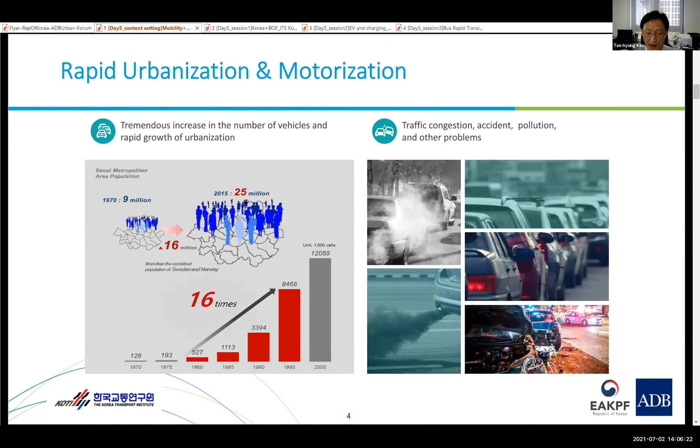So the many cities in Korea have been experiencing a rapid increase in vehicles and urbanization over several decades. This phenomenon has been causing numerous traffic problems in Korea, such as traffic congestion and traffic accidents, air pollution, etc.

So various policies and efforts at the national level have been attempted to solve these transportation problems. Several strategies, such as constructing new roads and managing demand, or providing new modes of transportation to reduce traffic demand, have been attempted. And we found that as one of the feasible solutions, ITS that can optimize and utilize the existing infrastructure and systems was introduced.

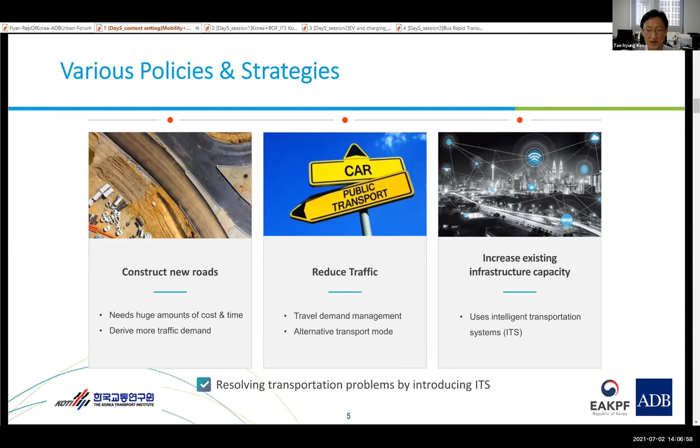The introduction of ITS has brought a variety of effects and benefits across sectors. Above all, the improvement of public transportation services has resulted in an increase in the number of public transportation users and a continuous increase in the modal share of public transportation.

It also had a positive effect, such as an increase in vehicle speed by 15 to 20% and a decrease in the number of fatalities caused by traffic accidents. It has also reduced greenhouse gas and oil consumption by decreasing traffic congestion and idling. The convenience and satisfaction level of citizens using ITS services have continuously increased.

In addition, the effect of contributing to the national economy, such as the growth of ITS-related industries and creation of new jobs, has also been shown. However, we have learned some lessons from the experience of Korea's ITS over 20 years and realized that there may be a next generation of transport systems beyond conventional ITS.

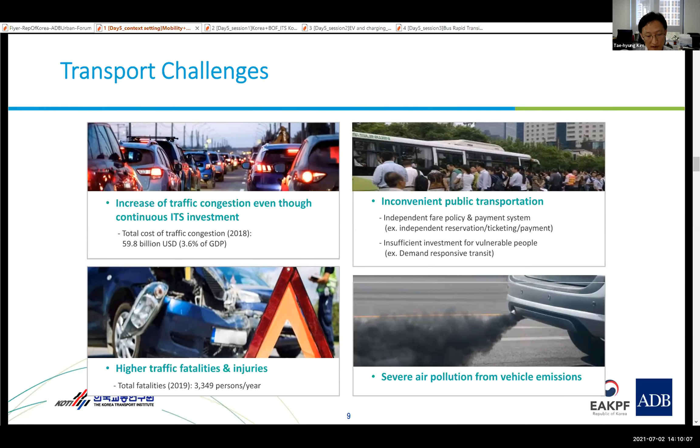The Korean government has initiated public and private cooperation on traffic information since 2014 to secure ITS-unequipped roadways by using private services such as TMAP or Kakao Map in Korea. This enables us to save budget that would be spent on additional ITS deployment and concentrate on ITS services for safety issues.

We also found that ICT advancement, converged with smart devices, big data, Internet of Things, social networks, and AI, has been changing all social service sectors, including transport services, by enabling higher levels of information connectivity.

So what could be a direction for future transport systems, and what kind of strategies and solutions can be applied? I believe one of the best solutions is the integration of transport and ICT-based infrastructure, which is ICT-enabled transport systems, that is, smart mobility.

Smart mobility systems could be deployed in more cost-effective and simpler, easier ways of installation, operation, and maintenance. Services for the people could be greener, smarter, safer, and more inclusive than conventional transport systems. Smart mobility could be classified into four features: autonomous, electric, shared and flexible, and connected and integrated mobility.

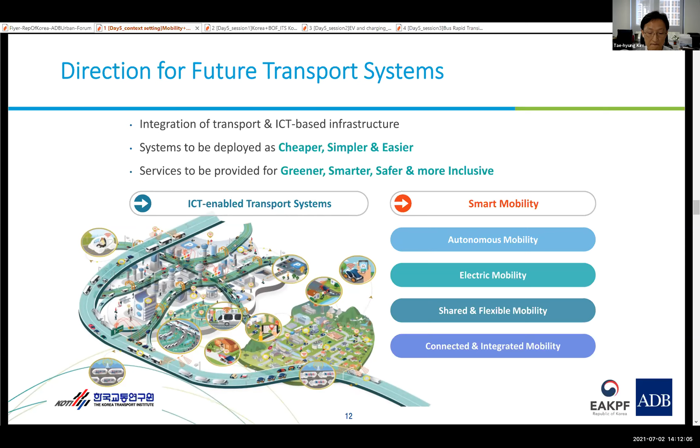From this slide, I'm going to briefly introduce our efforts toward smart mobility in Korea that we have done or are currently in progress.

This is cooperative ITS, or C-ITS, the next generation ITS technology based on vehicle-to-vehicle and vehicle-to-infrastructure communications. C-ITS can collect more accurate and seamless traffic data based on individual probe vehicles and provide more customized and convenient traffic services to drivers, such as traffic information, safety, and emergency services based on V2V and V2I communications.

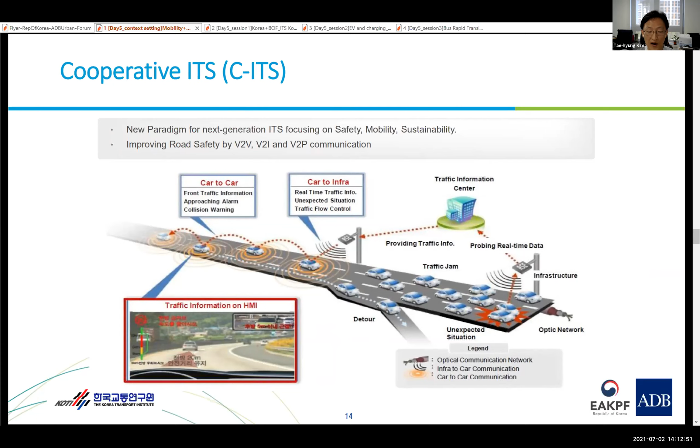The C-ITS pilot project has been successfully conducted on expressways, national and urban highways, and urban roadways in Daejeon and Sejong City for 3 years to verify C-ITS technologies and services and prepare for full-scale deployment. It is now expanding to other cities such as Seoul, Gwangju, and Jeju Island.

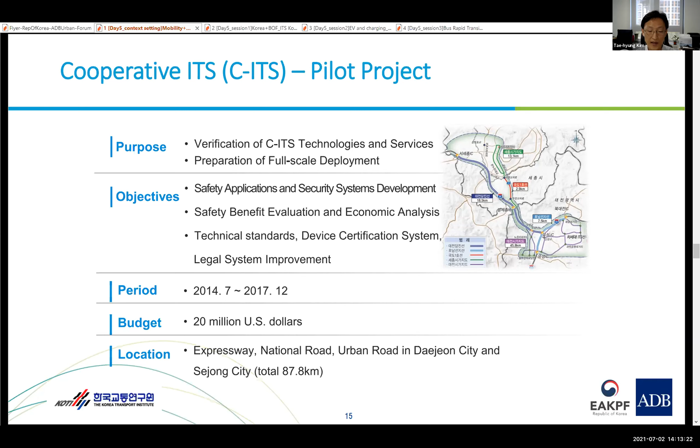This is the automated shuttle service that could be one of the killer services in smart cities. Many countries and cities have developed automated shuttle services such as EasyMile and Navya, and conducted pilot tests or demonstrations on roadways. Korea also developed an automated shuttle named Zero Shuttle, which has been under field test for stabilization and localization in Pangyo City.

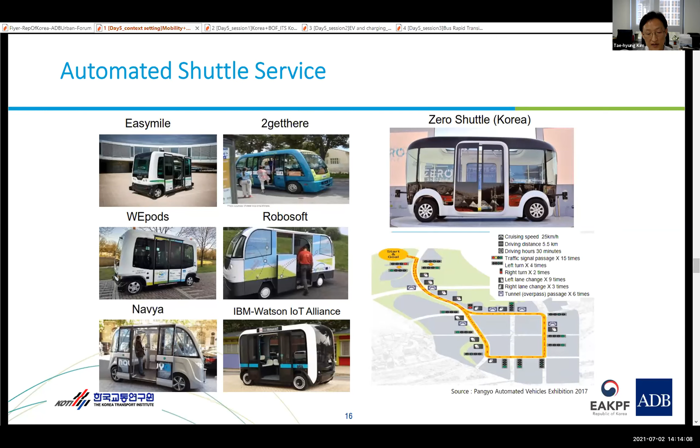In addition, research recently began to develop and serve automated buses to the public through a National R&D project since 2019, and a pilot test is underway on real roadways in Sejong City.

A national smart city pilot project has also started in Sejong 5-1 district. One of the core services is to implement an automated shuttle service for 6 to 12 passengers based on circular operation on a fixed route, with unmanned operation.

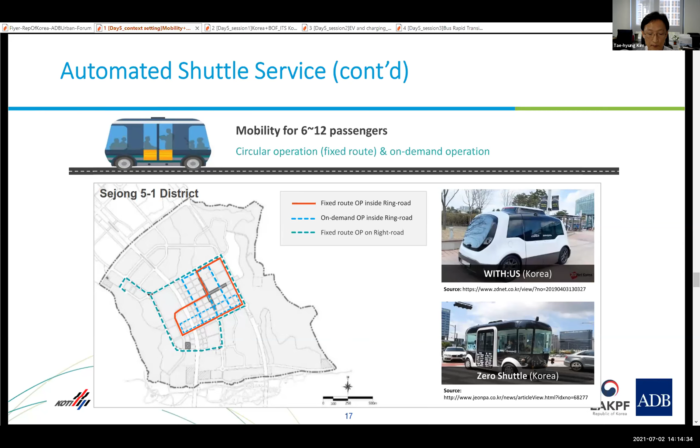In order to improve first and last mile mobility and mitigate traffic congestion caused by vehicle ownership and motorization, we have applied personal mobility and car sharing services, and they are widespread in Korea right now.

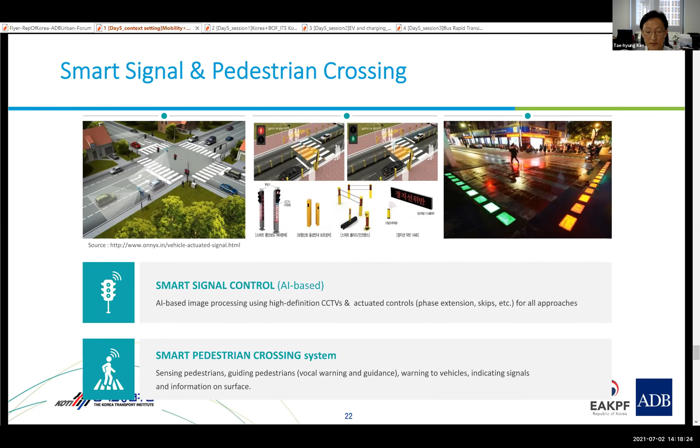Recently, a smart pedestrian crossing system, which has several functions of sensing and guiding pedestrians, warning vehicles, and indicating signals and information on the surface, has been implemented in several cities in Korea and will be expanded nationwide to improve pedestrian safety.

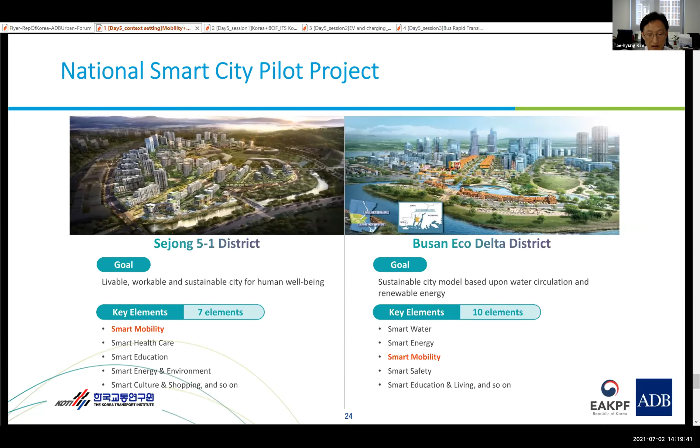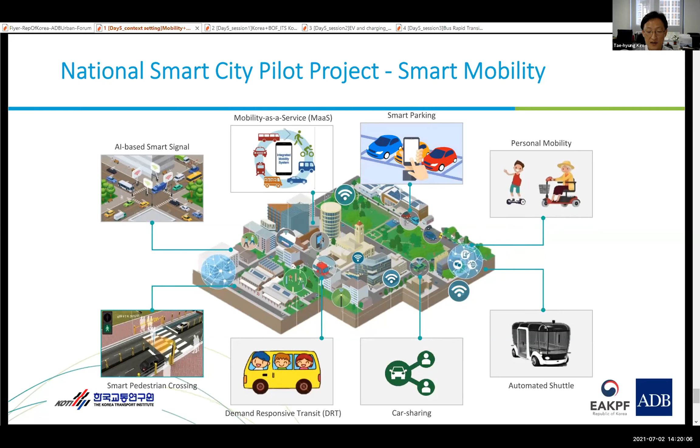These services will be provided to local residents who will move in around May of 2023, after pilot tests for each service. This is the end of my presentation, and thank you very much for your attention.

Thank you very much, Dr. Kim, for that very interesting presentation. It's very interesting to see how you have an integrated system of private vehicles, public transport, and even pedestrians. I think what's also very important is the last mile connectivity, because oftentimes it's the poor and vulnerable that are affected by that. So that's very interesting to hear.

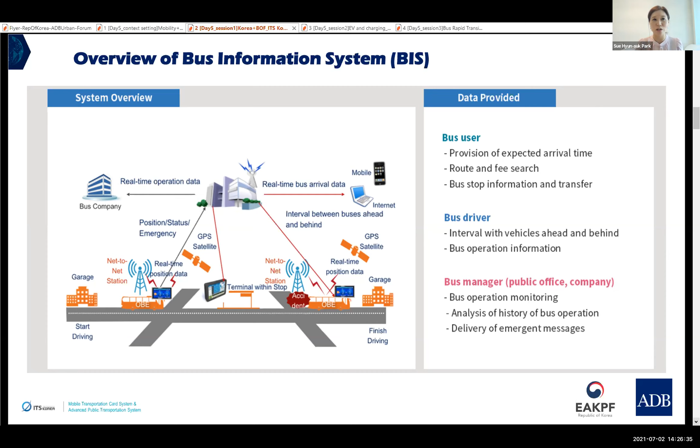Why did we introduce this system? In the past, let me take the Seoul case. In Seoul, the urban traffic situation had really bad congestion, and buses didn't have any punctuality in their arrival. So people preferred to have their own passenger car, and in that way the traffic congestion worsened and worsened.

To improve service quality by securing punctuality and improve user convenience, they tried to improve bus services, which encourages people to use public transportation. So through the adoption of this BIS, we can facilitate the usage of public transportation.

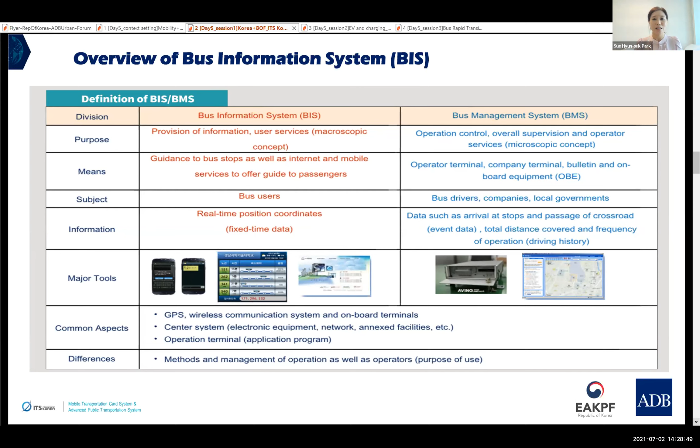This BIS system, it's been a long time to implement this. Actually, BIS is implemented since 2004 to 2005.

Seoul did bus reform in 2004, and at that time they also adopted this BIS system. Right next year, 2005, many local governments started pilot projects in BIS, which means we have like 20-year experience in implementation of BIS.

So now we have lots of methods and lots of ways to implement BIS. For collecting data, we can use the OBE, or we can use mobile application.

In terms of the BIMS center, if the local government has lots of buses operating and secured, in that case they can have their own physical BIS center. But otherwise, if the local government doesn't have enough money or enough buses, in that case they can use the cloud center.

They can share the center with other local governments by the cloud center. Based on your local government situation, we can suggest application, smartphone or website, or if the bus station has really many people using it, we suggest this type of BIT installed in the bus stop.

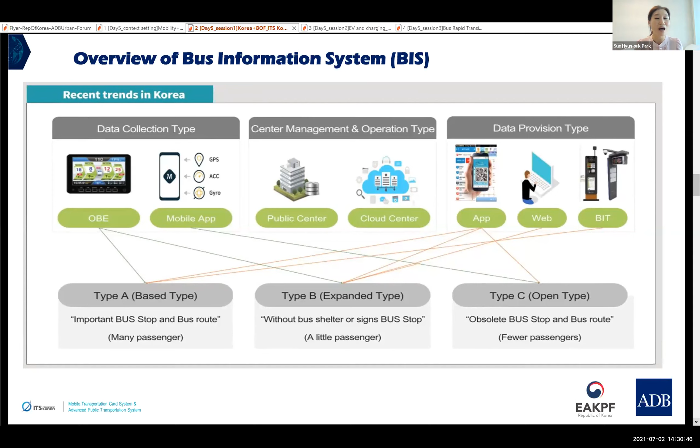As I mentioned, regarding the center, there's the independent center or center sharing, and this OpenBIS is not actually at the commercialized stage. This is the R&D stage and development stage, because without the physical center or without the sensors, we can implement the BI system only using the smartphone application.

So when a country or city wants to implement BIS but doesn't have enough budget, in that case maybe they can use this kind of OpenBIS, but it's not commercialized yet.

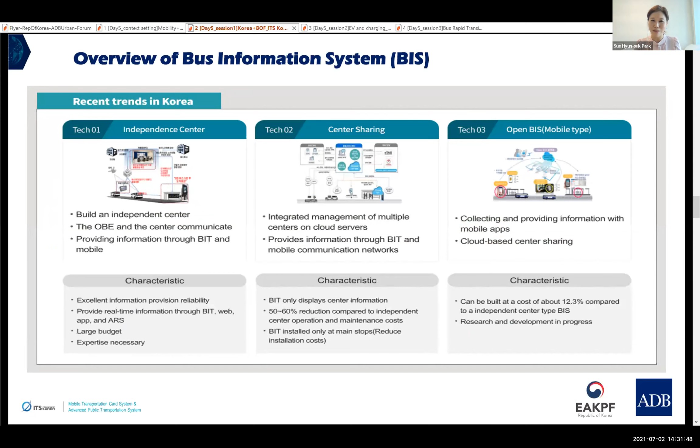As I told you, we have had 20 years to implement BIS. Already 150 cities have their own BIS services.

As I told you, this is quite popular. Now every Korean person is using BIS in their daily life, and the satisfaction is quite high.

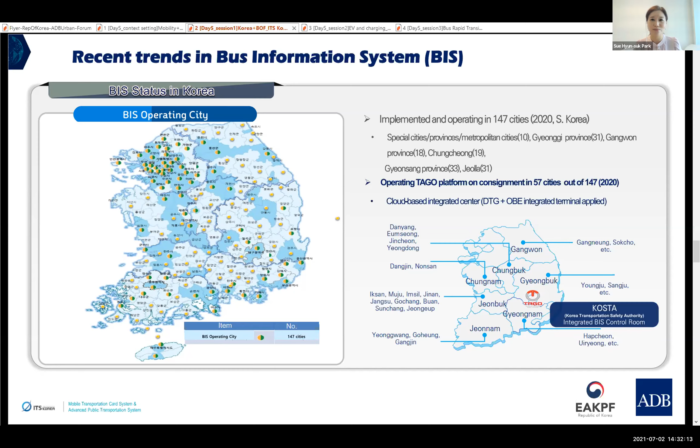If you see here, people are using the bus every day, so these kinds of services are quite close to the people and users. The citizen satisfaction is quite high.

Also, through this BIS system, we can monitor the bus driver's behavior. In the case of Seoul, accidents decreased by 24% because the drivers know the local government and bus company are monitoring their driving behavior. So it is contributing a lot to decreasing bus accidents.

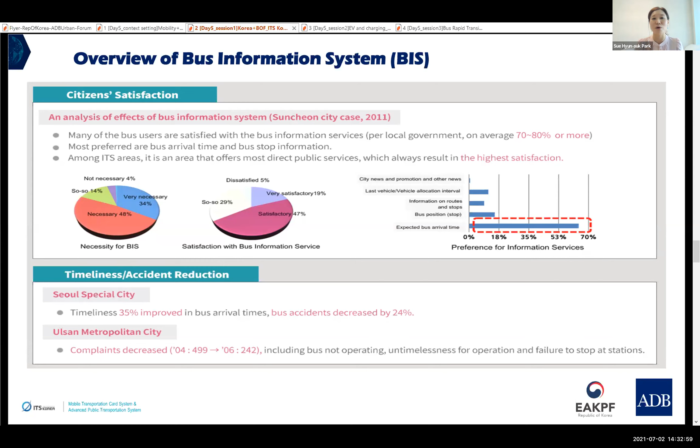Actually, this is something I covered already, so I'll just skip this. Now I'll move on to the AFCS, Automatic Fare Collection System. This is the second part consisting of our public transportation.

Now everyone, or most people, are using the transportation card instead of cash. In the case of Seoul, for the subway it's 100%, and for the bus it's almost 99%.

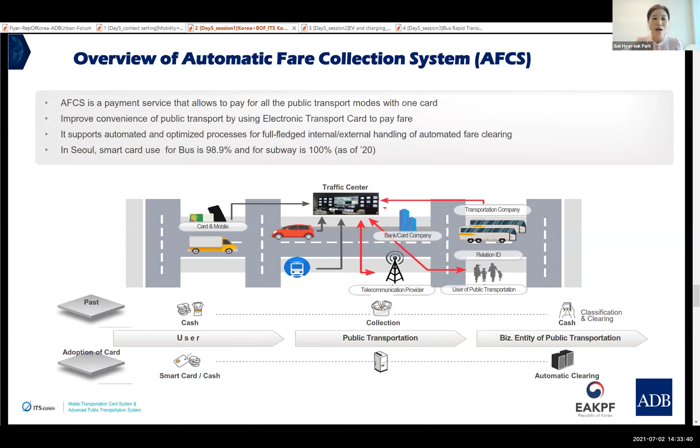In Korea, we have one card, all pass, which means if you have only one card, you can use it everywhere in Korea. Let me take an example of T-Money. If you have a T-Money card, you can use it in Seoul, Busan, and Jeju area.

Not only that, you can use it for various transportation modes: subway, bus, KTX, urban bus, intercity buses, and paying the toll, and many other places with the integrated T-Money card.

I can say that this one card all pass is a very initial stage of MaaS, because we can integrate the transportation modes and pay with one card. By doing that, we increase the convenience of users a lot.

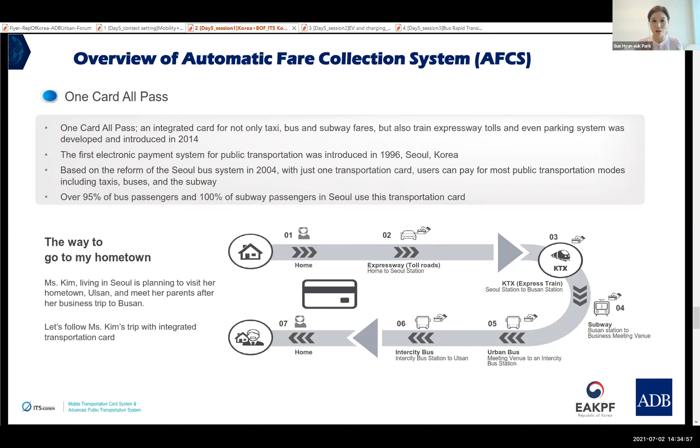Now I'm going to talk about the benefits of AFCS. For the user, it's quite convenient, and all the data is accumulated through this AFCS. This kind of data will be used by local governments or policymakers to establish new policies.

Let me explain about the Seoul MaaS implementation plan. Recently Seoul established the ITS master plan, which includes some of their plans on MaaS. Seoul has 10 million people living there, so a lot of transportation modes are there, and that information and data are integrated through the company called T-Money. So they have bus information and taxi information, and now they are providing some bicycle and car-sharing data as well. All of that data is collected in Seoul, so Seoul will be implementing MaaS based on this integrated data.

But the thing is, to implement MaaS is not a matter of technology. It requires a lot of agreement between the relevant bodies. So to realize real MaaS in Korea, we need to solve these problems in advance. This is the end of my presentation. I'm sorry I had to cover many things, so my presentation was a bit fast. Thank you for listening to my presentation.

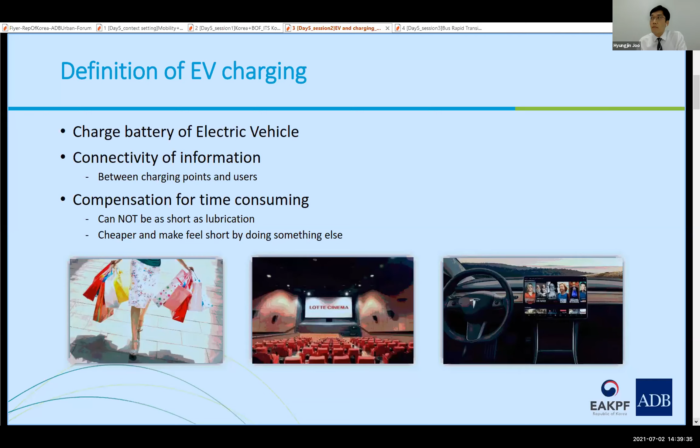Let's call it a behavior change from a feature phone to a smartphone. We used to look for a bigger battery size as the first step, and then we changed our behavior to charge as often as possible. It happens to EVs exactly the same way. Rather than finding bigger battery capacity and faster chargers, we will focus on finding a less time-sensitive pattern.

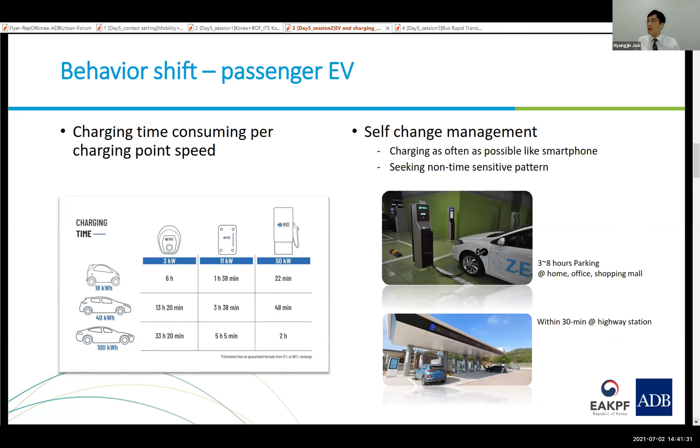Fleet is different from passenger EV behavior. There is a higher entry barrier to replace existing gas and diesel vehicles with electric. Korea's government utilizes subsidy policy to work this out.

They provided $15,000 to taxis, which is 1.5 times higher than general EV subsidy, and $80,000 to EV buses. Although those subsidies decrease every year, I personally think it is very effective to convince taxi and bus companies to move on to electric.

Additionally, saving fuel and maintenance fees are important criteria for them. Both cases require fast charging depots as mandatory, so charging solutions have to be considered in parallel with vehicles. A battery size higher than 70 kilowatt-hours for taxis and higher than 200 kilowatt-hours for Metro City buses would be sufficient, considering vehicle mileage in Korea market statistics.

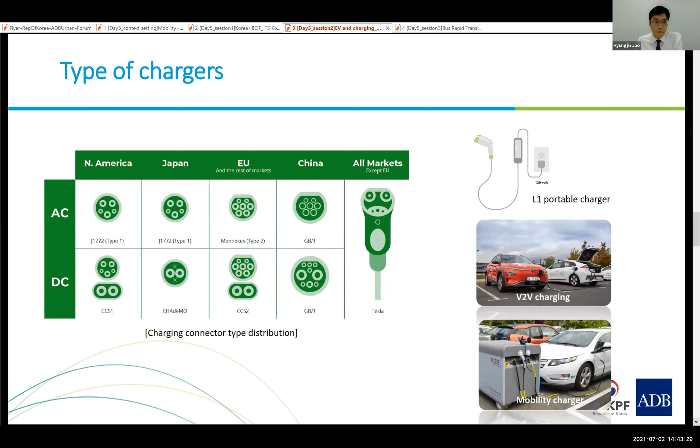Korea is one of the successful cases that shortly populated EV charging infrastructure with government-driven support. MOE, the Ministry of Environment, has invested in high-power chargers in public places, including highway rest areas. KEPCO, a government company and monopoly power distributor, invested in more than 8,000 chargers over the last 3 years.

Our company, ChargeEV, is running 11,000 chargers with 60,000 subscribers as the first generation company in the market since 2012.

First of all, you have to secure locations. The appropriate location is based on your target charging speed and business target.

From a hardware component perspective, there is the fast charger, called a DC charger, and the AC charger, normally called a level 2 charger, with 7 kilowatt speed, canopy to protect chargers from weather conditions, and IoT modem to communicate between platform and chargers, etc. There are more complicated components on the software platform side.

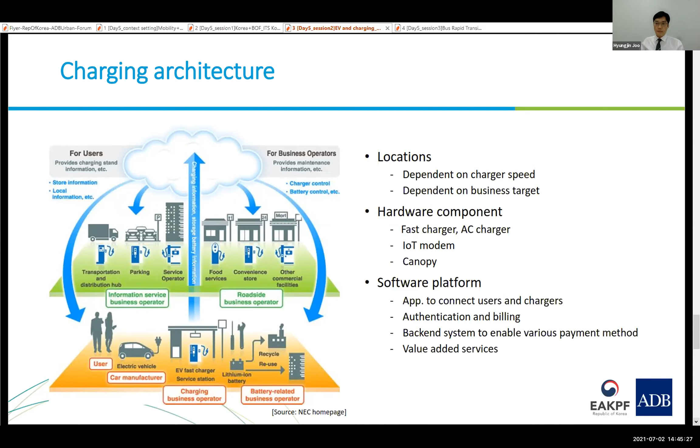As a consequence of this presentation, I will share my thoughts to be considered when launching an EV project. The most important thing is to check the government policy direction. Since the government has a limited budget, it is important to understand the government subsidy direction and grab the sector to target. In the case of Korea, government put higher priority on passenger cars, buses, and taxis than motorcycles.

Then you should understand the local environment. Who will own the vehicle in the target project? Who is the landlord of the target charging station? By reviewing the Korea case, most highways are owned by a government company, and it was not easy for private companies to secure highway rest areas.

So our company focused on destination charging stations rather than route charging stations. Understanding the difference between must-have and nice-to-have is important too. Everyone prefers fast chargers and bigger battery size, but it is not a cost-effective approach for someone who uses a vehicle for a 10 kilometer commute and periodically charges at home and workplace.

Utilizing IT technology is important to provide useful information and better user experiences, such as displaying charger location and availability in the application, making a reservation for charging usage, starting and stopping charging remotely, etc.

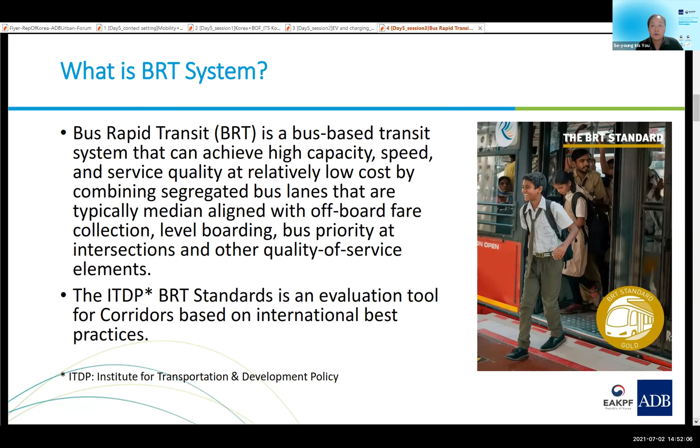The most important outcome directly goes to citizens as a benefit, such that commuters so badly want BRT system to provide on-time service like a metro system.

As you guess, we have several BRT issues in Korea. Our individual vehicle penetration rate is very high, nearly 0.5 vehicle per person. It means that our road capacity is already full. When we put separated bus lanes on the road, it is always controversial whether it is efficient or not.

On the other hand, if a dedicated lane is close to V by C, volume over capacity, it is high chance to build a queue at the bus stops, which is going to violate the initial goal of BRT system. So what we really need is to maintain the efficient level of condition with operation standard and management system.

We also have several issues such as bus lane layout, requirement of bus doors, screen doors, and huge gap of onboard bus units among cities. I would like to say that it is because of different capability and budget by cities. When BRT system operates across cities, it often suffers congestion and service deficiency at city boundaries.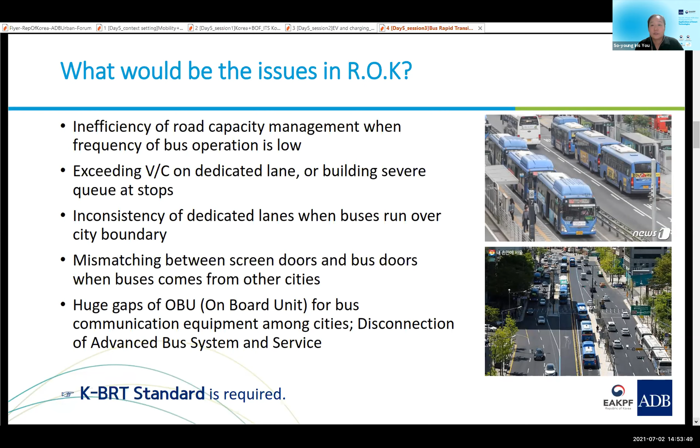Right now, our responsible department is providing rules to meet the standard of SBRT as well. SBRT is our advanced system that we are currently doing research and development on.

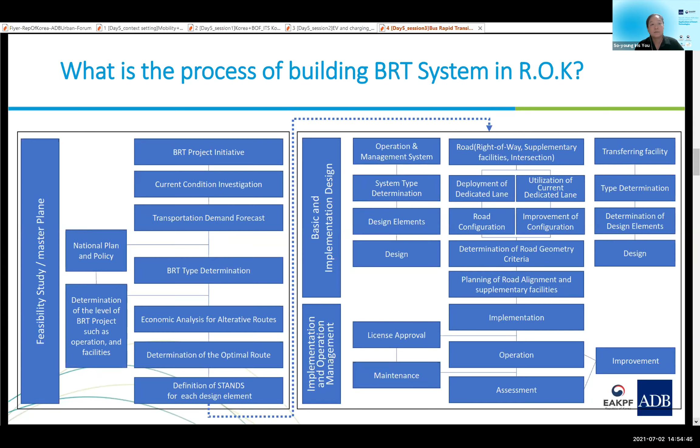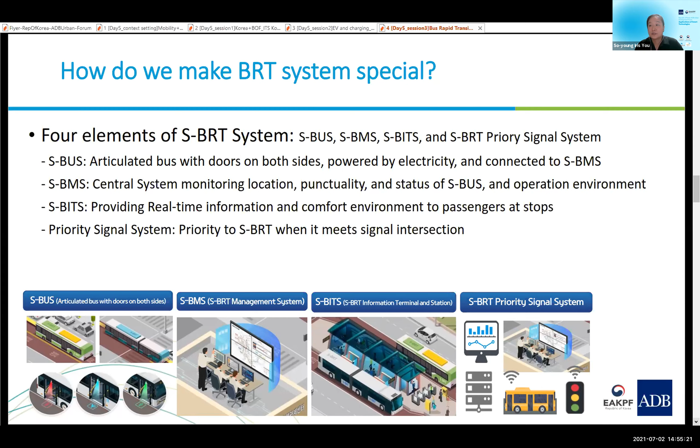So let me tell you about SBRT in detail. Our SBRT consists of 4 elements. Firstly, S-Bus, which is the vehicle itself. Secondly, SBMS, the Management Center System. Thirdly, SBITS, which provides real-time information and comfortable environment for passengers at bus stops. Finally, the priority signal system at intersections is the last element.

S-Bus is one of the vehicle types to serve BRT only. Our BRT S-Bus is an articulated bus with doors on both sides, powered by electricity. It has good quality passenger ride comfort and convenient boarding with vehicle scaffolding.

The bus will also automatically detect each passenger's trajectory from onboarding to offboarding. Ultimately, it will apply to a fare onboarding collection system. Some of you may not feel it is an advanced vehicle, but what we are trying to implement here is a bus with doors on both sides.

Currently, we don't have regular ground operation of both-side-doors buses, so we are trying to prove it is efficient and safe. Of course, S-Bus corresponds to infrastructure which includes a dedicated right of way, island type platforms, and overtaking lanes.

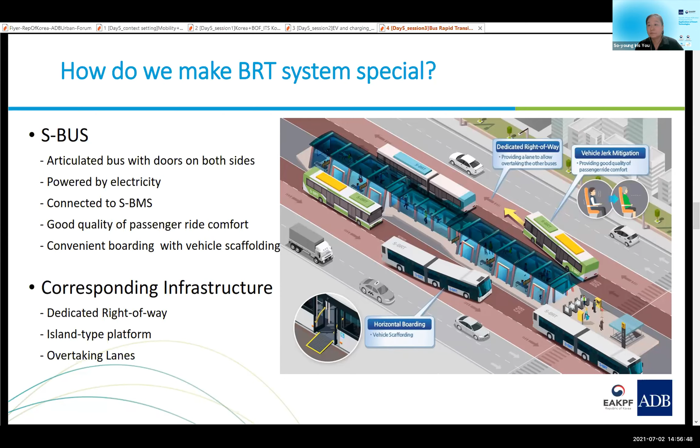As mentioned earlier, SBMS is taking charge of managing service quality and operation efficiency control. It will also hold a variety of operation scenarios and choose what the city really needs. For example, an emergency vehicle can use the BRT dedicated lane without barrier if necessary, and SBMS can make the lane clear by sending a BRT control signal.

Priority signal system and pedestrian safety detection could be made as a final decision on the center system. Also, SBMS will reduce drivers' stress by eliminating bus drivers' tasks besides driving itself.

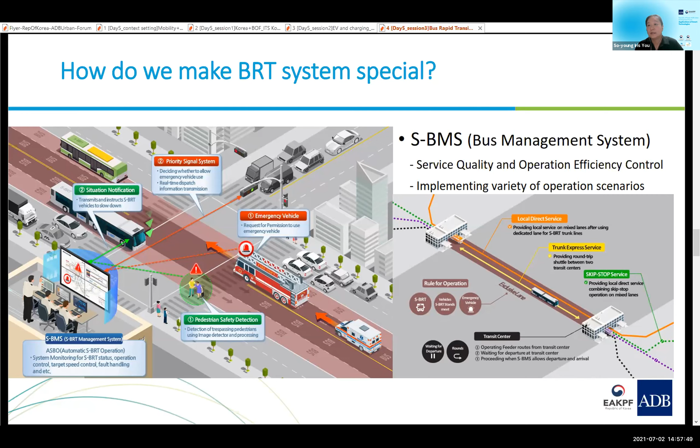SBITS is Bus Information Terminal and Station. Our goal for SBITS is providing more comfortable waiting space for passengers regardless of weather and bad quality of atmosphere such as emissions. Also, it should be a safe space from a public security perspective.

ITDP requests a pre-fare collection system to save onboarding time. However, in Korea, we have pretty decent fare systems with a smart card using NFC technology. So we also have many stakeholders, and sometimes it is not easy to balance fares across multiple operating agencies. So it depends on the city. Therefore, if necessary, we can replace this with an automatic onboarding fare collection system.

What we are also trying to improve here is the tagless type. It's a little bit more advanced tagless type. For example, if you're holding the smartphone in your pocket or bag, you don't need to take it out and tag it on the payment terminal. Next, please.

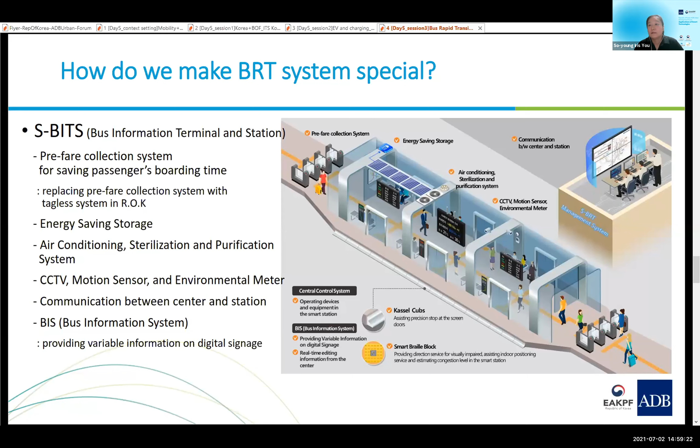This is the priority signal system. This is well known and has been studied for a long time. However, we haven't fully implemented it yet in Korea. This is because the authorities in charge of bus operation, signal operation, and road management are different and independent, so it's not easy to reach a consensus among them.

So right now, what we are doing for the priority signal system is to set 3 modules and find a solution that doesn't violate, or maybe it's better to say, that minimizes violating each authority's boundary and responsibility.

Module number 1 is to optimize the time-of-day signal schedule and bus operation schedule with a two-way communication and feedback procedure. Module number 2 is to notify and allow bus departure at each stop at a controlled interval, after the central system calculates the condition without the bus stopping at the intersection.

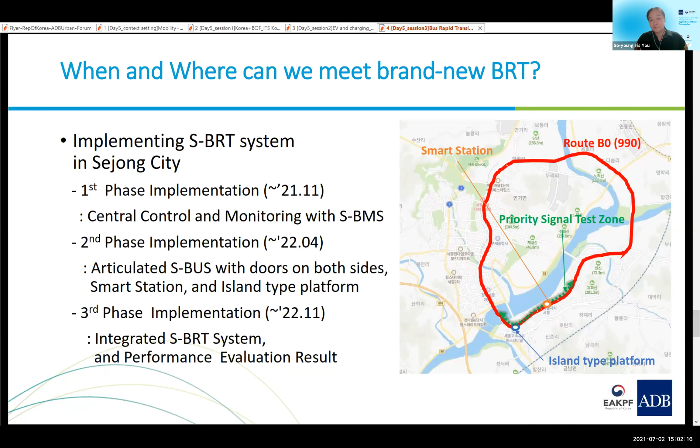I think the first time I heard about BRTs was back in planning school when they were talking about the BRT system in Curitiba, Brazil. It's amazing how far it's gone with technology. I think this is a very excellent example of taking traditional infrastructure, just buses and dedicated roadways, and making it more efficient with technology. I think this is something ADB developing member countries would be very interested in, and it would be very relevant to solving a lot of their transportation issues.

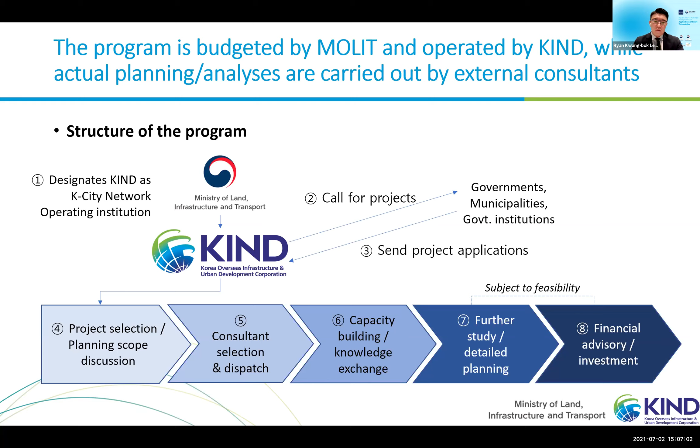You can take one example: Vietnam's smart city in the Mekong Delta region was supported. Also, Thailand's Khon Kaen smart city mobility master plan was selected. And for 2021, there are also new projects: the Philippine Clark Freeport Zone Smart City Master Planning was selected, and also Vietnam's Haiphong Smart Transportation Management System Master Planning was to be supported.

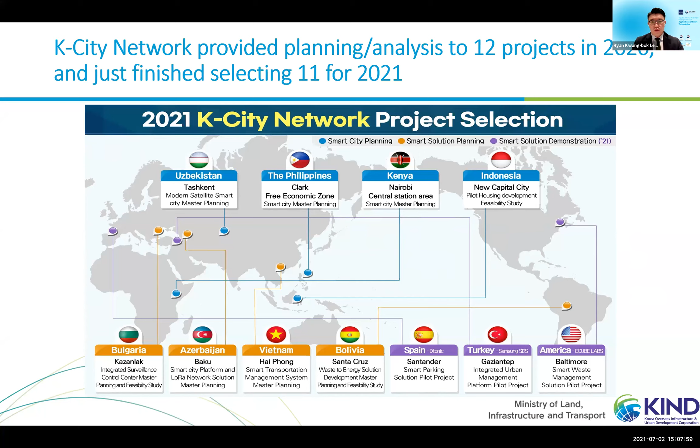Despite its short history, the large volume of applications provides insight on the latest demands of smart city development. We reviewed the smart city development purposes. There are many cases where they need to tackle existing urban problems, and they try to adopt smart city solutions.

Philippines Clark is one case, and Myanmar's Naypyidaw wanted to develop a smart water metering system. Also, there is existing city development plans, but when they develop it, they wanted to make it future-proof by adopting smart solutions. Indonesia's new capital city is one case. Also, Vietnam's Ha Tinh smart city is a plan to adopt smart city technology to make the urban development future-proof.

There are some other cases, like tourism locations and smart campuses, where they wanted to adopt smart solutions. In Malaysia, Penang Island and Pangkor Island wanted to develop smart mobility, kiosks for tourists, or smart tickets—those kinds of solutions.

Smart city development governance was also different by country. In Indonesia and Laos, the federal government has the strongest demand. If you look at the Philippines and Vietnam, the central government sets a higher level concept and direction only, while many cities and provinces show strong demand for developing their own smart city.

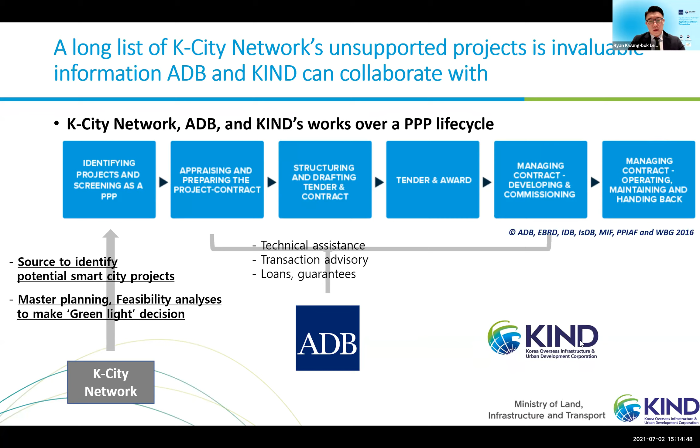So this is the typical PPP process that was suggested in the Certified PPP Professional Body of Knowledge. Throughout this process, K-City Network can become the source to identify potential smart city projects, and it can become the source for master planning and feasibility analysis funds to make the green light decision. ADB has technical assistance and transaction advisory and all these financial products covering many stages. And KIND, as the governmental investor, can provide financial advisory and structuring and equity fund investment, and it will carry out sponsor duties so that the project can be financed and managed.

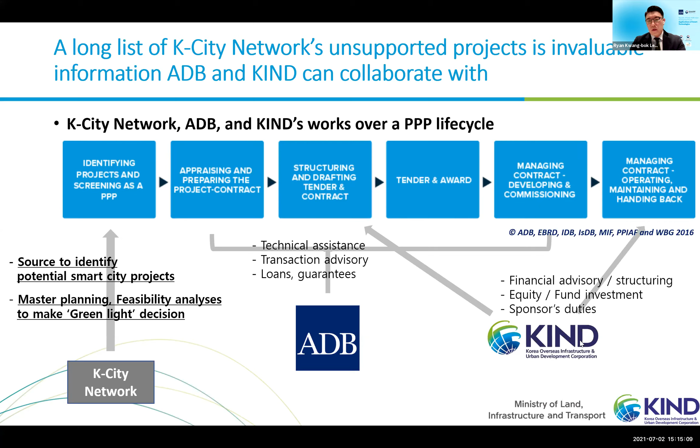And this is my final slide. One recent renewable IPP deal shows that meeting stakeholders' needs and targets will lead to a good blended financing structure. Let me show you a very interesting project case. This is a Fiji solar plus ESS PPP structure. I just modified it for presentation purposes, but the original source is the Development Marketing Institute.

So there are these financing sources: equity, debt, and grant. You can see the grant, so it is a structure for blended financing. As equity, there's a private company who invested 100%, $2.1 million. And there was debt from Fiji Development Bank, but out of this $4.9 million, GCF provided 3.9 million. So pure exposure from Fiji Development Bank was only 1 million.

So by adding this equity and debt, there was this special purpose company with $7 million, and they will have the EPC and operation and maintenance contractors. This SPC is supposed to sell the power to national power company Energy Fiji, and Energy Fiji will pay the tariff to this solar power company. KOICA in this structure provided a 4 million grant, and they provided ESS to Energy Fiji. And GCF didn't stop at lending only—they also provided $1.1 million in capacity building to the ministry.

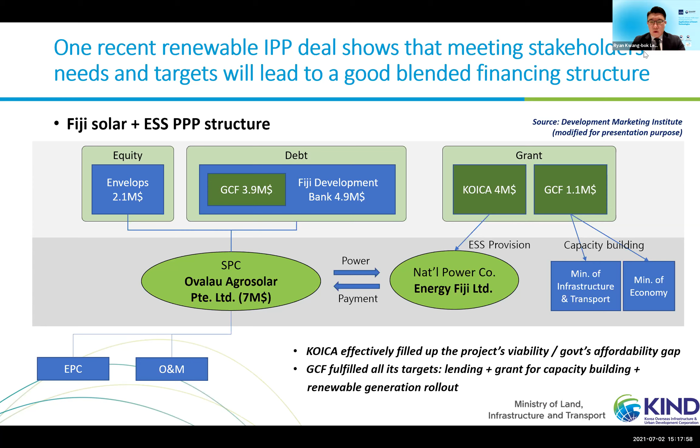So KOICA gave this grant for ESS, and this filled up the project viability gap and the government's affordability gap. GCF also fulfilled all these targets—lending and grant for capacity building, and also the renewable generation rollout. So this is my point: when we do project partnership making and financial structuring, if you understand different stakeholders, their different demands and goals, and if you more correctly understand their support conditions when it comes to MDBs and DFIs, we will have a much better chance to realize a blended financing structure.

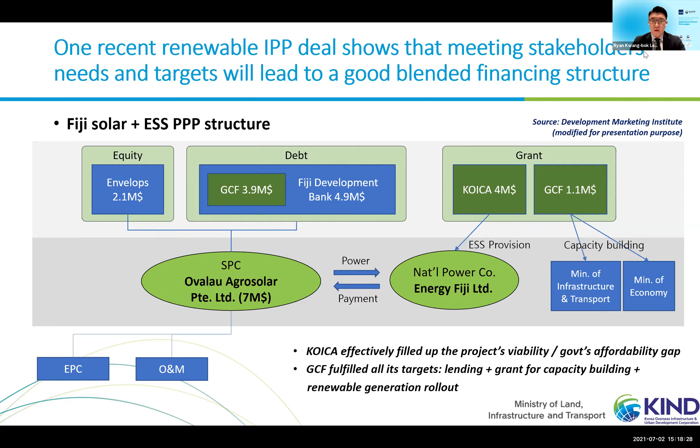So today I introduced a K-City Network program and shared the insights we've got from the operation. I also suggested roles for each stakeholder of Smart City and collaboration with ADB and KIND. Lastly, I showed an exemplary blended financing case where each stakeholder's different needs were all well addressed. Although the case was about energy, I'm pretty much sure we can apply the same principle to our Smart City development. Thank you very much.

Thank you very much, Mr. Lee, for that very interesting presentation. It's great that Korea has this mechanism and program whereby you're supporting the wider use of IT in urban management and governance, and also how to manage resources. You mentioned projects in water management and air pollution. But I think what's also very important is what you underlined in the latter part of your presentation: it brings together different stakeholders, the government, private sector, and ADB. By bringing them all together, you find a way to make the project more feasible, financing wise.